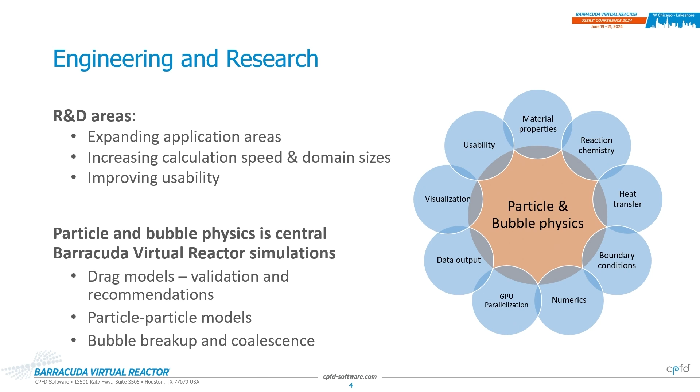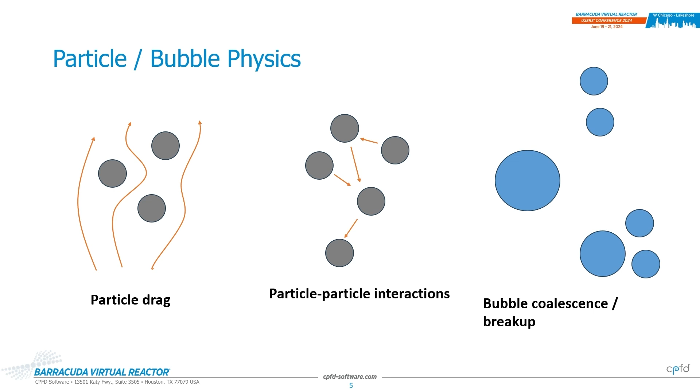Just to be very clear about this, so particle drag, we're talking about here, this is momentum exchange between fluid and the particles. Particle-particle collisions, or these interactions, are really looking at momentum exchange between particles and how they interact with each other. And then the final thing is bubble coalescence and breakup, or other changes in size of particles, either size or number of particles within the system.

And for drag, I think I'll just get right into it. For recent releases, we've added quite a few new drag models, or new to Barracuda, let's say, that are built in. For a long time, we've had a drag parser where you could implement models that were not built in, and we get requests for, hey, I want to use this model, and we say, okay, yeah, we can put it in.

It's a little bit faster computationally to use a built-in model, but of course, the side effect from having all these extra models is you get the question, well, which one should I use? And drag's kind of a funny thing in that there are, I don't know, at times, like personal feelings that come into

drag models. And so what we wanted to do, and this has been a project that's been going on for quite a while now, is to go back and look at really foundational data sets in drag models. And so this is from looking at data sets used by Wen and Yu in the famous paper from 1966, where they pulled in their own data plus data sources like Wilhelm and Kwauk and Richardson, Zaki, et cetera, and went through these papers and pulled in bed expansion data that was used to do this fit, to determine this exponential constant for the Wen and Yu drag model.

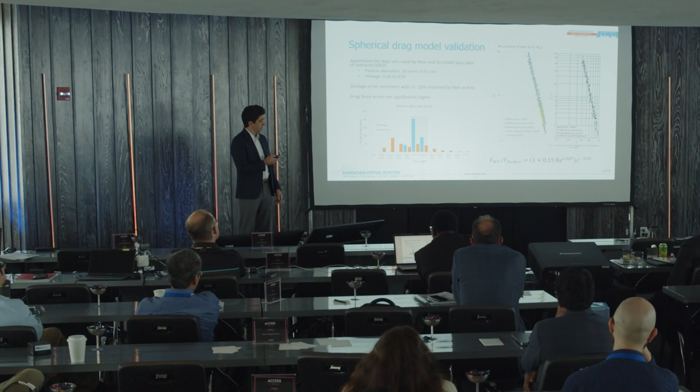And so we went through the same analysis with this data and reproduced the same curve from the paper here, and it's pretty close. There's some points that are in the paper, and I can't find them. I don't know where they came from, but we're pretty close. In this paper they report voidage error of plus or minus 10%, and for voidage we see about the same thing.

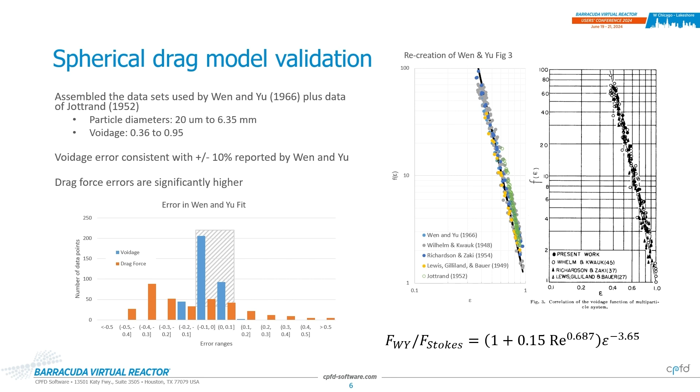The problem, though, is that voidage is kind of sneaky in that we've got it to some negative exponent here. So when we actually look at errors in drag force, they're quite large, more like plus or minus 50% for this data set. So this is interesting, but then the question is, what are we doing with this?

Actually, the original goal of all of this was work we were doing to try to develop yet another drag model. I guess the world doesn't have enough of them, but one where we could take minimum fluidization data and use that as an input into the drag model. And so from these data sets, we had this full data set, and then there were curves where there was a defluidized region, just packed bed pressure drops, so we could determine what minimum fluidization velocity was for those particles.

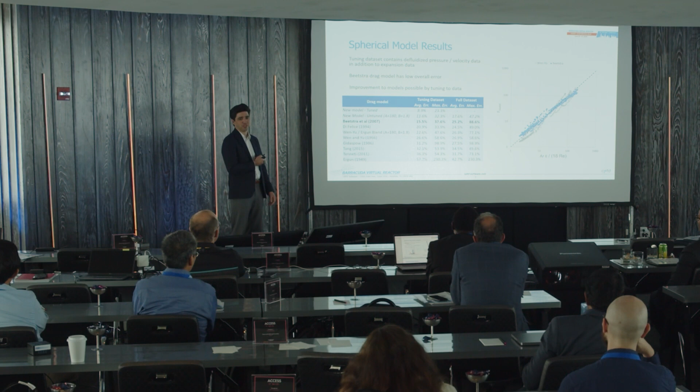And it's really a good validation of the data, because otherwise you're just told this is the diameter, it's sand or glass or lead shot or whatever it is, but the question is how much of the errors that we see here are errors in drag models, or is it just scatter in the experimental data? So this is the goal, and someday I'm going to maybe finish this paper. I've talked about this at a few conferences.

But for this group I want to talk about the Beetstra drag model. When we look at the amounts of error in these different drag models on what I consider the more quality data sets, Beetstra, I think, is quite good. So if you don't know anything better, I think Beetstra is a good starting point for a drag model for spherical-ish particles.

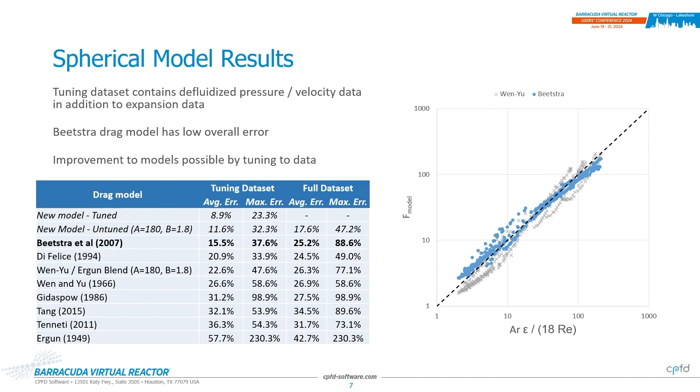For non-spherical, though, there are other drag models you can use. So I just want to have an example here. Okay, we got a video. We've been doing work recently with a company called Molten Industries. They're developing a methane pyrolysis process for decarbonizing steel production, and there's plans to model many parts of their system. But as a start, we just wanted to model this little cyclone that they have as part of their process.

The goal in this case is not necessarily 100% separation of the carbon from hydrogen. What they have coming out here are some flakes, and they're quite non-spherical, and we didn't have much more information beyond that. So the approach here was to use some bulk density data that they did have at close-pack, and go back to this very famous paper. I spent a lot of time with the Wen and Yu paper.

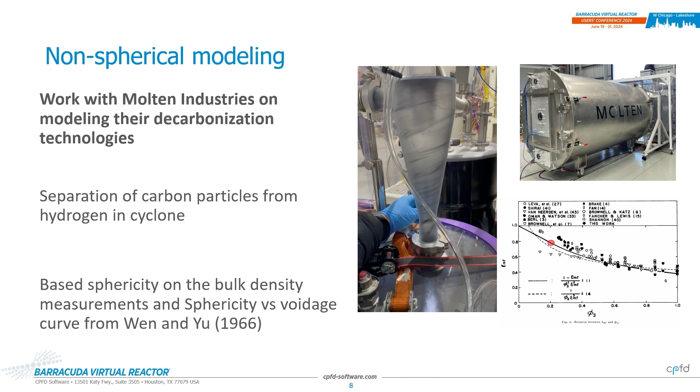Look at data on voidage at minimum fluidization versus sphericity. You say, okay, based on this data, we think we've got a sphericity of this range. Put that into the drag model and run the case. And this was right out of the box. This was the very first simulation, no tuning.

We get very good agreement with PSDs, both coming out of the top and the bottom of the cyclone. And the efficiency here was dead on. It was within 0.1% of their measurements. So Beetstra recommendation, Beetstra accepted. You've got cases where it's maybe more dilute, and single particle drag models, non-spherical particles. Maybe you have to take a different approach.

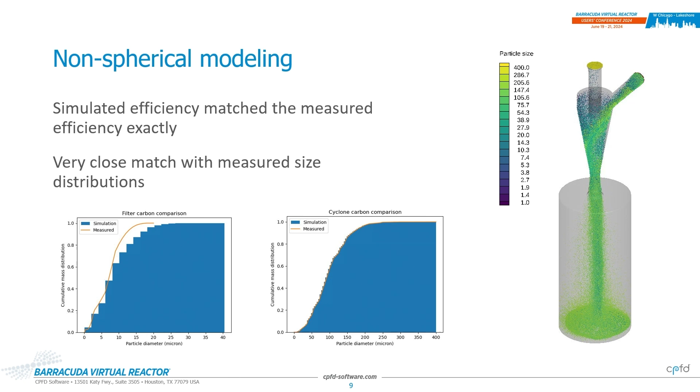The last thing I want to talk about in terms of drag is the subgrid modeling. This can become important at larger scales where we simulate systems with rather large cells in them, and at that point, as the cell sizes become large enough, we can't really assume anymore that the particles within these cells are uniformly distributed throughout that cell, and that the particles are going to see a local voidage that is the same as the cell average voidage, and the local velocities are the same.

There are various models for this. In Barracuda, we've had an EMMS model for quite a few years that is trying to address this issue. We've also recently added this Radl-Sundaresan model, and this is one that we've had quite a lot of success with, I think, in getting good pressure profiles and entrainment in larger scale systems.

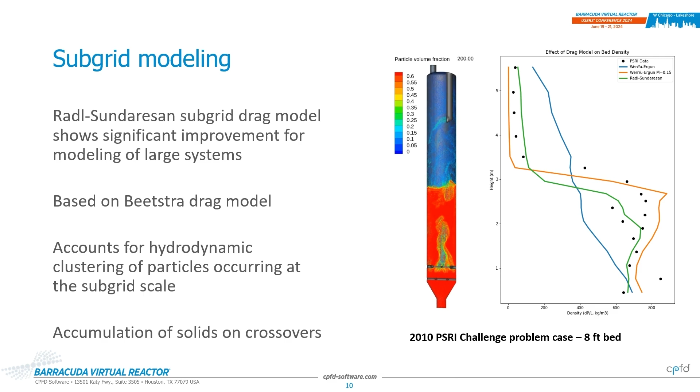As a caveat here, we are seeing at times using this model some accumulation of solids on crossovers into cyclones and things like this, where we go, I'm not sure about that, and it's something we are looking further into. I think there's a directionality that we need to consider with the flow, or the flow relative to gravity, and whether the subgrid effects are still valid in that direction.

So with that, I want to shift to the particle-particle models, and the first one I want to talk about is the blended acceleration model. This has been in the code for I'm not sure how long, but a long time, and we do get questions about it. Basically what's happening here is for a polydisperse set of particles,

as they are near close pack, say a non-dilute system, we're going to see a very small particle or a low density particle next to a larger or heavier particle. If we just calculate the acceleration due to drag, they're going to be accelerated at quite different rates. However, there are also collisions happening at a higher frequency than the time scales we're simulating over. So the idea of the blended acceleration model is that as you approach close pack, you see more of an average acceleration of these particles, based on the summed mass of the particles around.

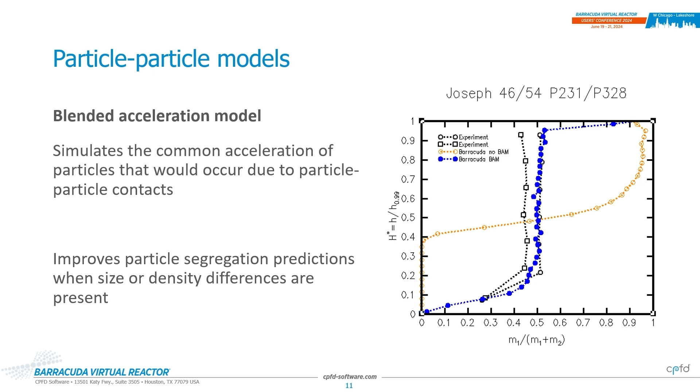So the question is, should we use it? And yes, I have it on in most of the simulations I'm running, unless it's very, very dilute, like maybe a cyclone, where you can save a little bit of computational cost. But there's really no downside that I'm aware of to using it. So then the question is, why is it not defaulted on? And I don't know.

Maybe it will be. It's coming up enough that, yeah, I think it's probably good to have that on. Next I want to talk about is a model we're calling, and I agree, this is not really a good name. We stick with the old name, we add a word to it. But this is momentum redirection, so

for the MP-PIC, one of our advantages computationally is that we are not calculating the direct collision of all the different particles, and instead we are modeling these through a stress that a particle would experience as approaching a region of close pack. And the question then arises, well, what happens to that momentum as particles are slowing down, or which way are they going to bounce off when experiencing this stress? And what had been in place for a long time in Barracuda, and it's actually still the default, is I think best described as a random scatter. Something's going to happen, they're going to bounce somewhere, we don't know where, it's random.

But we've been investigating cases in spouted beds where we're just not seeing a lot of participation by particles. There's kind of overly stagnant regions. And it was tracked down to this model. And so we proposed a different one, which I think is a very reasonable assumption, to say, well, instead of bouncing randomly, they're going to go preferentially in the direction of decreasing stress.

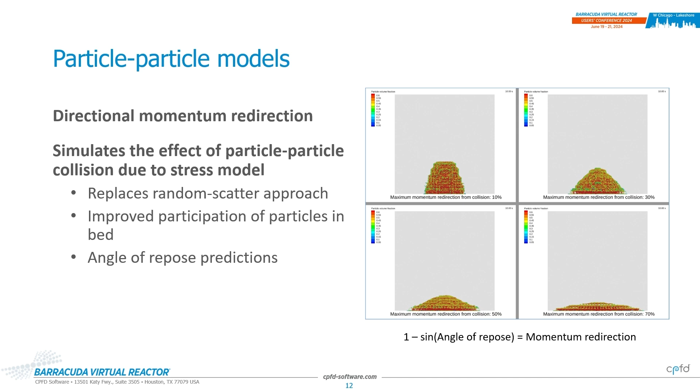And what we saw with this model is we indeed see a higher participation of particles, more consistent with experimental validation, and also get these nice angle of repose simulations. These are my sand piles here that we did not see with the random scatter model. These piles at times are not very stable, but with this new model, we do see this. There's a very nice correlation with this momentum redirection parameter; the default roughly translates to a good angle of repose for sand.

So this model was in beta in version 23.1. It was performing well, we didn't really see any downsides to it, only upside. It was fully released in version 24, and I think we're making it the default in 24.1. The last thing I want to talk about here is this bubble breakup and coalescence model. We released our discrete bubbles feature in version 23.1, late in 2023. And I think I talked quite a bit about this in the previous users conference. But when we did release these capabilities, we had no bubble breakup or coalescence model.

And it was kind of the big asterisk on this, because there were definitely cases where it wasn't important for the simulations, but there's others where we quickly started seeing that we need to be able to model coalescence to accurately predict the bubble transport and separations within these systems. So what we've done is we took a breakup and coalescence model from this paper by Lehr, and set out to implement this. Now the challenge here was that this is a population balance model, so we're looking at collisions between every bubble and every other bubble in the system. Having that kind of calculation in Barracuda is going to hurt the efficiency quite a bit. It's kind of a no-go.

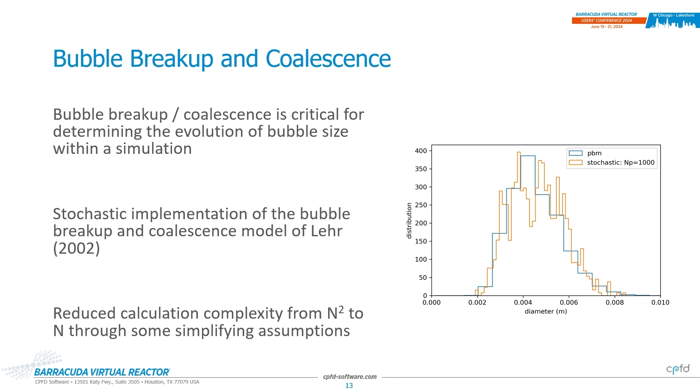And so when you start modeling other things like hydrogen and some hydrocarbons and stuff, there is some adjustment that definitely needs to happen to bring the coalescence models in line with any experimental results. But really, this was I think a nice addition that came in, I think, version 24, maybe.

But so I'm gonna stop here on the particle physics research that we've been doing. There's certainly much more that has been added to the code since our last users conference. And I'm going to turn it over to Andrew. He's going to share more about the other work that's been done.

Thank you, Jim. I'm Andrew Larson. I'm the principal software engineer here at CPFD. I'm going to talk a little bit about changes since the last users conference that you can find in our software, and then put in my plug for acceleration. Big green play button.

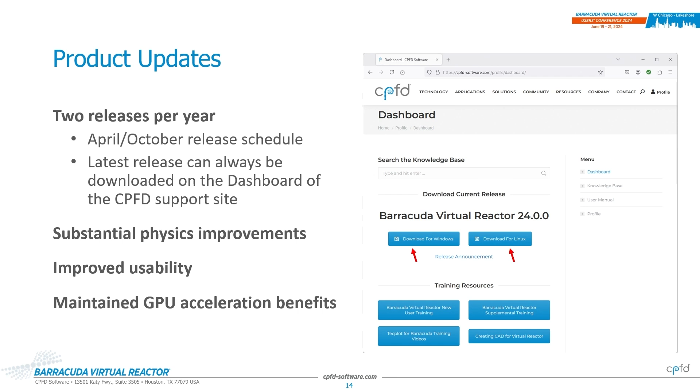So we've been doing this for a while, but we are doing 2 releases a year. We'll do one in the spring, one in the fall, and as Jim talked about, we spend a lot of time with physics, putting in improvements for modeling, also usability, so that you guys can get the job done, and then spend a lot of time verifying that any sort of work we've done to speed up the code is maintained version to version, and then making improvements incrementally along the way to make it faster, to get results quicker.

And some of these people have already talked about through the day, so I'll just touch on some of these. So for 23.1, that is when bubbles were introduced, and that came along with absorption model. We have condensation, evaporation. Bubbles can change size due to compressibility, and then work with the drag models.

Also, and this one hasn't been touched on, is the tracers were improved, and these are tracers that you can put into the system. They will follow along exactly with the gas flow, and in this way you'd be able to understand what is your residence time of the fluids moving through your system. Particles you could get residence time for a long time, and this really enables looking at the other phase.

As far as usability, we're consistently working on usability in the GUI for making input easier, more straightforward, and then also picking out those features that are going to provide the most value. Batch movie has been around for a very long time.

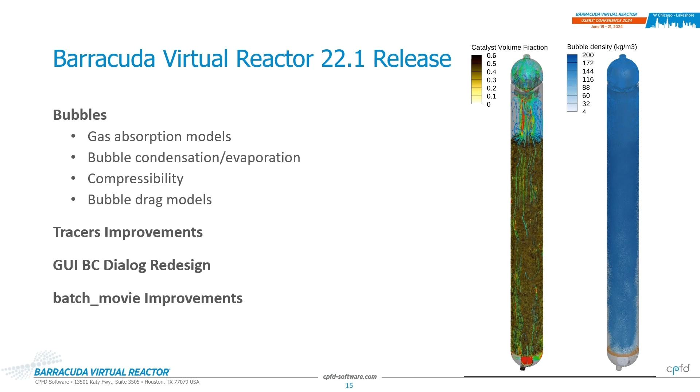Thanks to Sam, and it has been updated from Tcl to Python. Yeah, oh yes, he is in the crowd here.

And so batch movie is good for animations, so if you're generating a lot of visualization files, you can use this script to generate something that's very fancy. And if you go on to YouTube, I think many of the videos were generated using batch movie.

For 23, the big update here is the drag models. Jim's talked about this. I think one of the important things to point out is the change in definition from interstitial to superficial. And so moving to superficial is what is matching in literature. And so if you have literature out there for drag models, this change allows the input of that custom drag model to be much more straightforward, or for those that are predefined and provided, you can make that mapping much easier.

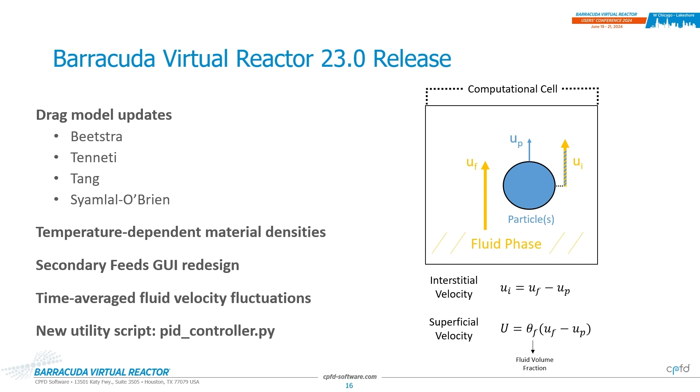The material densities are temperature dependent. I think this is really important for liquids. Secondary feeds, we have GUI stuff, so we have more improvements for usability, for input, and some more usability scripts and output. Again, with this, we would have spent a lot of time to maintain any sort of performance gains that we've had in the past, to ensure that things aren't slowing down as we add new things, which can often be a challenge.

23.1, so more work on the bubbles. Jim talked about that. Drag model. One that hasn't been mentioned is the per species close pack volume fraction. And so this is important. Before this release, you could only specify one value for your close pack volume fraction. With this, now you could have multiple species and say that if you have something that's very granular, that close pack volume fraction is much higher. If you have bigger particulates, you can set it lower, and this then affects how things pack and the different dynamics in the system.

And then again, we're just incrementally improving what sort of output is available, getting to the information that the simulations can generate for assessing validation concerns and that type of stuff.

Mass and energy. These log files are available and they're very detailed, and they will actually provide information, what's going in and out of your boundary conditions, and then also you could look at system-wide levels of your fluid composition or what solids you have in your system all in one file. And this is nice, so you wouldn't have to do this manually, otherwise in some sort of post-processing step.

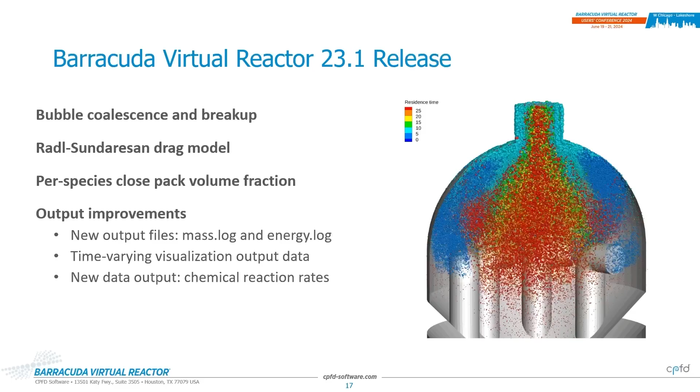24.0, the graphics here are for the automated plots, and this is through Tecplot. This is a macro that provides a lot of basic plots that you'd want to use when you are setting up a simulation, getting things running, and looking at what your unit is doing. And so there's runtime, some flux plane outputs to give you that visibility to know that you need to make a change.

Time-varying gravity, this is an interesting one. If you have a fluidized bed, gravity makes a big difference. And if gravity is changing, that bed will have dynamics that change along with it. And so there's some particular applications where this is very important and useful.

Particle thermal conduction was added. The target application there is for fixed beds, and when you have particles connecting, there is some sort of heat transfer that happens that is particle volume fraction based. That's the real driver for that one. And then again, more improvements on stability for evaporation, the model that Jim talked about in terms of physics improvements. So physics improvements, usability, and again, performance is maintained.

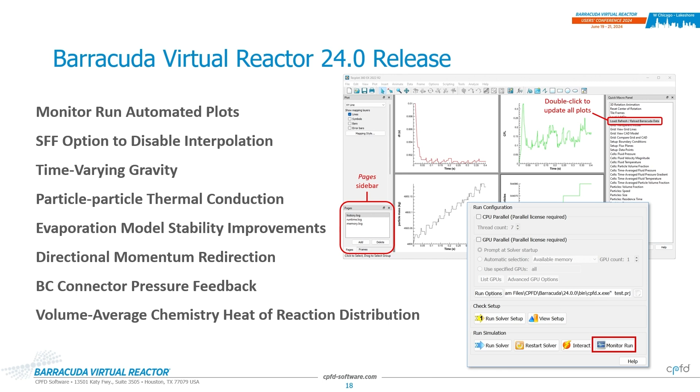Okay. I should be a bit better at this part.

So, for the hardware, I think the big thing on this slide to take away is that NVIDIA puts in a lot of time and effort to produce new hardware, and they are making really big gains every time. And so if you do have older hardware, you should move it aside, buy a new one, put in a new one, because you're going to get significant gains. I guess here the recommendation is 5 years old, but in general, we have seen from one generation to the next sometimes a 2x improvement in performance. And of course that also comes with consistent increases in memory size, which is what's allowing you to run larger and larger simulations.

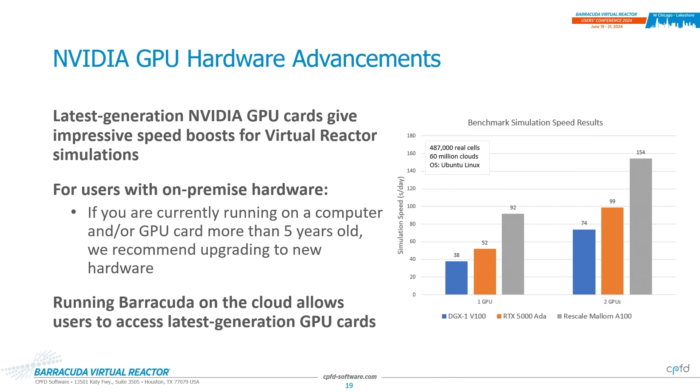If for some reason, and this has been touched on too, you're not able to get access to this hardware or your hardware is old, there are cloud providers that will take your money and allow you to run on the latest hardware. And that's a good way to get extra capacity. And then this would go to any sort of metered licensing, which you all have in your bag. That would be a good use for it.

Here is a slide for multiple GPUs. I think one thing I wanted to mention here is we have two operating systems that we support. So if you're running in Windows, there is a hard limit to the size of problem that you can run, and you can only use one GPU. On the Linux side, there is a soft limit to the size of the problem you can run. So if your problem fits inside of the GPU's memory, you're going to run really well.

If you exceed it, you can still run. It will still work. It'll run a little bit slower, but that same piece of underlying support is also what allows us to use multiple GPUs to provide even more speedup. And so here, I guess the example is 60 million clouds, and the scaling is respectable.

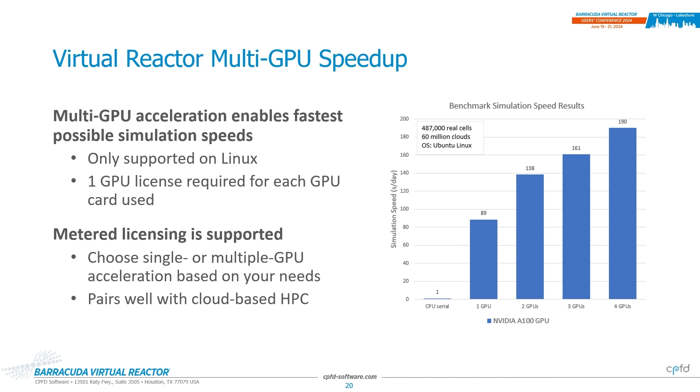And for this, you can buy multiple licenses for each of these GPUs locally, or again, if you are able to use a cloud provider for acceleration, there's metered licensing options. And I think with that, I will turn it over to Sam.

Okay, great. Thank you, Andrew. So I will just touch on a few support and training updates. Some of this stuff might be very old news to some people. Some of it might be new news to others. We definitely strive to provide excellent support, right? So if you're having struggles with Barracuda, don't struggle alone.

Please send us an email, and we would be happy to communicate via email, especially with big time zone differences if you're on the other side of the world. But if there is a convenient time to do screen sharing or something, we tend to do that a lot. Like, hey, let's just jump on a video call. Let's take a look at your setup. Try to figure out how you can be successful with Barracuda.

Best way to contact us, as it has been for a long time, is send an email to support@, and there's probably 6 or 7 of us that see these emails come in. You'll often get a response from Rosemary. She's our most active supporter at this point, but we have a number of people who are available for consultation on more detailed matters as well.